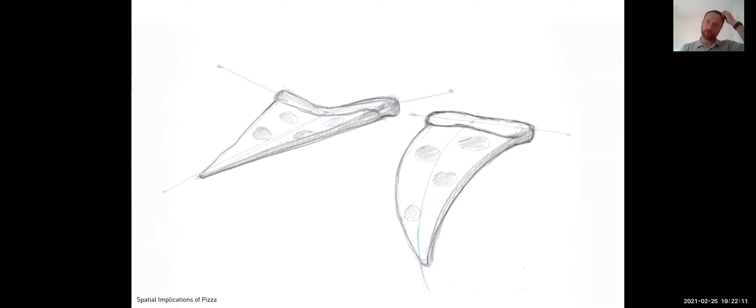We use the same principle with paper airplanes, and there's a structural principle at work here called virtual depth. Really what this means is that effectively the pizza, when we fold it, is acting as if it's the full depth of the fold from the lowest point to the highest point, rather than just the actual physical thickness of the pizza. We use this principle at my firm all the time, and any folded plate structure, which is not a super uncommon kind of structure, uses the same principle. So this is one of the projects that was on that intro slide.

This is actually a stair in a San Francisco Victorian house, and basically what the principle is here. So this is all eighth. It's actually a little less than eighth. Not quite 16th inch, but a little thinner than 1/8 inch steel. So very, very thin steel, and it's all perforated, which is why you can kind of partially see through here.

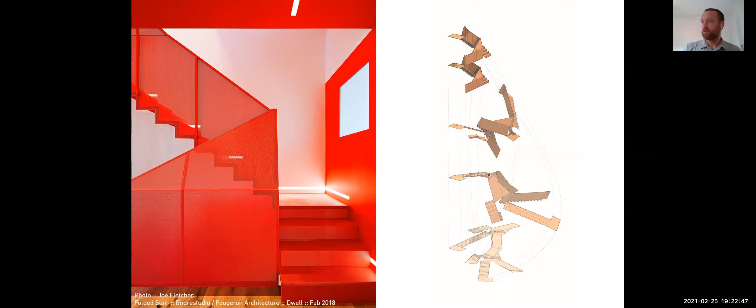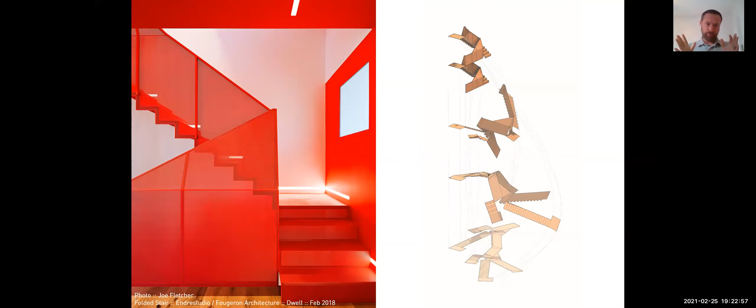And so that alone, if you stand on it, super flexible, right? It's just going to kind of bend and buckle and even dent under a person's weight. But when you start to fold those things, you get substantial stiffness out of this. And so we can make a 2-story high stair out of conceptually a single folded plate, folded piece of steel. And that's what you see on the right in this diagram: conceptually the whole thing is basically made out of one piece, and then we just fold it into this 3-dimensional

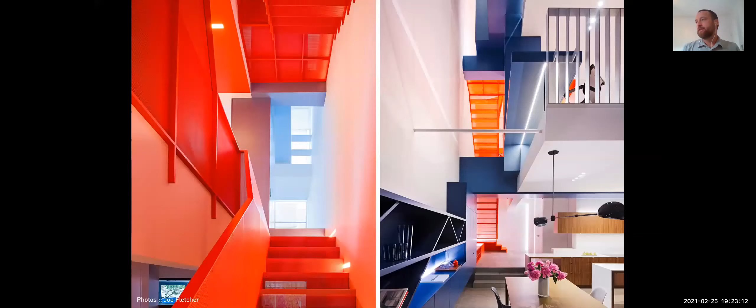structure. And the reason why this was so important, not just because it's awesome, but also because with these Victorian remodels, they're very narrow houses. And so when we were designing this, we were working to cut through the house as much as possible and really open up the space. And so there's this huge glass wall kind of behind the camera on this right image. And the last thing we wanted to do is then go put a solid staircase right through the middle of this. All the work that we've just done would have been sort of negated by the stair.

And so the use of this perforated stair allows that to not only have some life and movement through the space, where we can kind of see that red color winding its way up through the house, but it also allows light all the way deep into the house. And so again, it's like a basic structural principle. How do we accomplish something spectacular in a simple, easy to understand way? And then what are the spatial implications of this? This is really the design ethos of my firm and my work over the last 7 or 8

years. So the next project I wanted to look at kind of builds on this idea. And so this was an idea of a flat packed adjustable pavilion. So you could basically break this down and ship it in a box, and then you could pop it up into these little shade structures. And the exploration here is kind of related to that idea of folding. It's connected to an idea, oops, sorry about that. It's connected to an idea of bending.

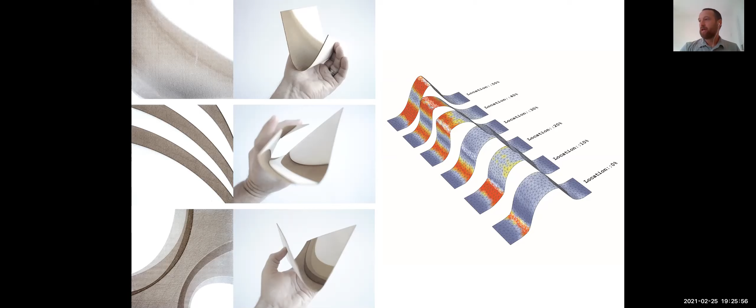Basically what we were looking at was, could we locally control the depth of the material in order to create specific types of bends? So you take a flat square element, and if you have a low spot, that creates a soft hinge or a locally weak area. And then as you flex that, it naturally bends the shape into whatever form you're trying to make it take on. And so with the same system, just changing the location of these curves, we create hinges in different spots. And the right diagrams show a number of different orientations and iterations of the same system, just slightly different CNC milled curves.

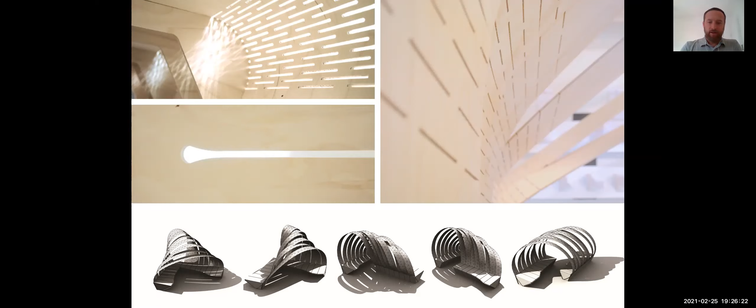So moving on to maybe something a little bit larger. This is a bridge that we just finished. It's actually almost a year old now, opened in March of last year. And this is in Ohio, just outside of Columbus. It's a pedestrian bridge. What you're seeing in the background here is the old town, which is kind of the old commercial and tourist center of this town, connected to this new development that's on the other side of the river here.

And so this bridge is super unique. But the main thing I wanted to focus on here is, again, it looks very complicated, and there are some very complicated structural problems here. But what allows us to approach these is very simple, very basic principles. So when we look at that central tower, for example, the cable that supports the whole bridge has a huge downward force, right?

And what we're looking at is when you split that force to create space between this and this, and this is what we do with houses, right? With a roof, it's what we do with all buildings to a certain extent. We take a vertical force and we orient it into either two angles, or we use an arch, or we use some other means of transferring that vertical force to a vertical force somewhere else.

So here we split that vertical force into two diagonal forces, which creates a thrust, right? It's a little unbalanced. And so the tendency would be for that element to just sort of kick out and flatten. And so we tied it back together again. And then that creates two smaller vertical forces that go down to the ground.

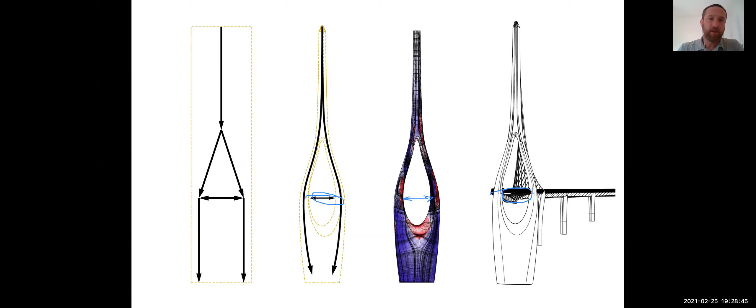Could you talk a little bit about how you're creating these images, the software programs you're using? Yeah, that's a great question. So we work really heavily in a program called Rhino, which is a three-dimensional modeling program. Rhino is for architects, it's sort of the gold standard. It allows us almost total flexibility in the geometry without putting too many limitations on us.

So the other major programs that you guys have maybe heard of is Revit on one end, which is a building information modeling software that Autodesk, who makes AutoCAD, produces. So you've got Revit, you have a program like Rhino, and then you have programs like SketchUp. And that's sort of a gradient in terms of what they're used for.

So SketchUp is an extruder, which means that it is very, very fast to model traditional rectilinear forms. It can also do curves and very complicated things, but you have to be a little bit more advanced to do that. Rhino was actually originally designed for boat building. And that's one of the reasons why it handles these very curvaceous forms really well. And then Revit is much more of a documentation program.

So Revit knows that you're modeling a building, which means that it's really hard for our work. One of the reasons why we don't use Revit is that it is expecting a wall to be vertical like a wall. And a lot of times our walls are not exactly vertical. Our doors aren't exactly door shaped, and our windows might be partially on a wall side and partially on the roof. And so sometimes we'll use Revit at the very end of a project just for documentation, but for design and for a lot of these diagrams that I've been showing, we use Rhino.

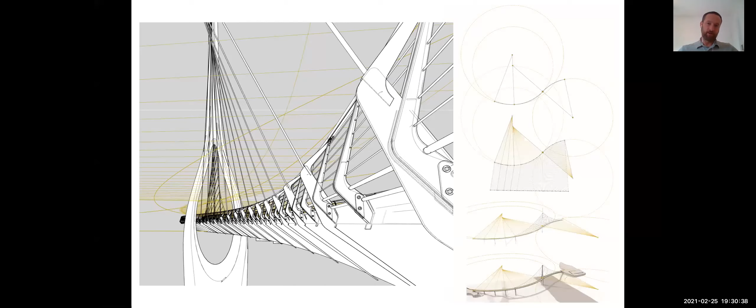And then Rhino has a bunch of plugins that basically add functionality for structural engineering and computational design and this sort of thing. Thank you. Sure.

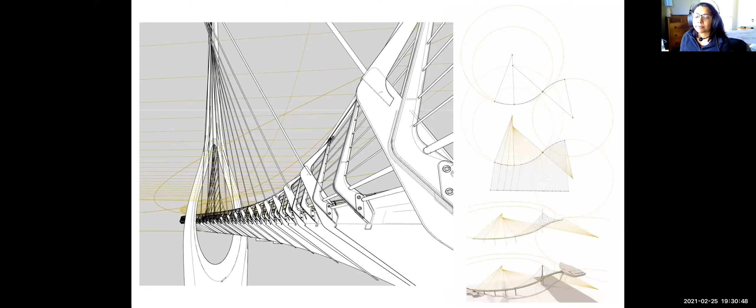And actually, this is probably a good moment since we're talking about software. This is one of the renderings of the bridge. And so this was produced with a plugin for Rhino called V-Ray, which is a standard renderer in the industry, but then a whole lot of work in Photoshop as well. It's an interesting thing because we're not just making pretty pictures for the sake of making pretty pictures. We're spending $22 million to build this bridge.

And one of the things that people want to know when they're spending that kind of money, whether it's the city who's actually heading it or the public that they answer to, is what are we getting for this money? And so we end up spending a lot of time and energy representing our projects in ways that people can understand. And some of that's trying to explain the structural forces and the efficiency, but a lot of times it's trying to just capture what is this space going to be like? What is the experience of being on this bridge going to be like, for example?

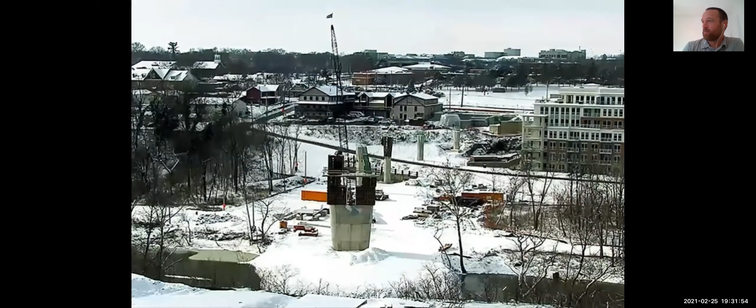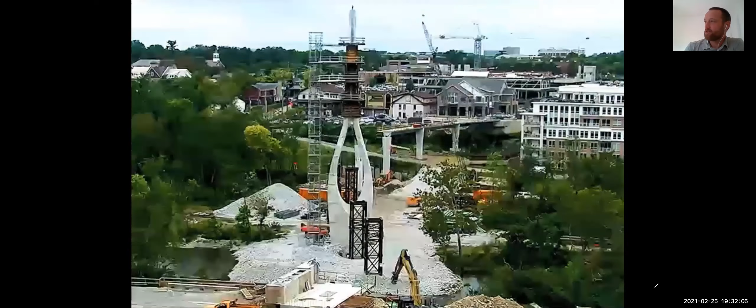And then these are just fun. So this is the construction sequence, basically one image every day of them constructing the tower. They actually modified some highway bridge forms with custom CNC milled foam inserts. That's how they cast the central tower. And then you can see they're pushing all the bridge sections in.

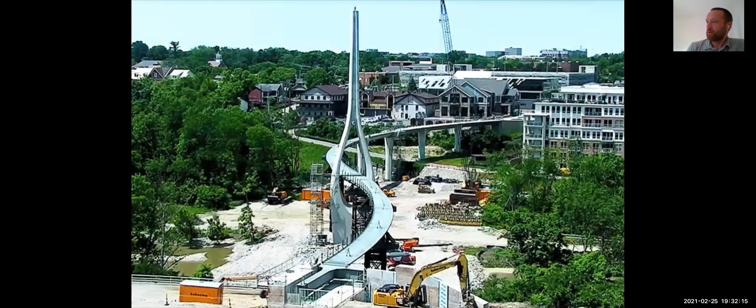They've got these little stands down below that support it temporarily, and they're moving rock around to kind of provide the working surface. There's the bridge, and then a couple of steps back, you saw the stands disappear. So they put the cable in here. That's not a very good color for this image. Let me try a different color.

So they put the suspension cable in, and then what you basically do is you have these support points which have the bridge a little higher than where it's supposed to sit. It's basically jacked up on top of these. You connect all the cables, the hanger cables they're called, and then you tension them to the proper tension, and then you basically unload the jacks, and so you transfer the load from the support points slowly onto the cable structure.

You try to do that very evenly, and there's a whole subset of engineering which is literally just how do you actually build these things. It's one thing to say this is how it's designed when it's finished, but there's also what's called construction sequencing or staging, where we really have to go through every step along the way and make sure that things are not going to fail as we're going along.

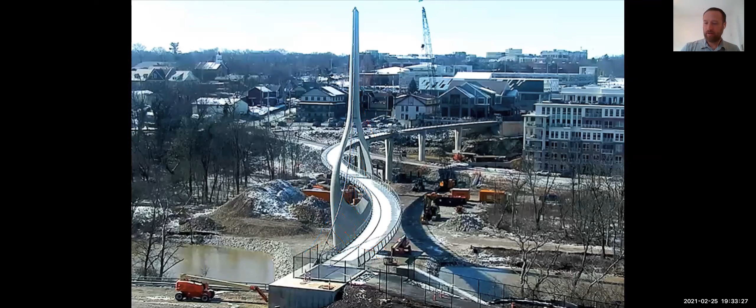Dave, we have a question in the chat. How much liberty do you have when designing structures like this bridge? Are there a lot of limitations? Yeah, that's a great question. The short answer is yes, there are a tremendous amount of limitations for anything that you do. And in many ways, the larger the scale, the more, well, maybe that's not exactly accurate.

So with things that are in the public eye, my firm specializes in civic projects. So even though we do a lot of private work as well, a lot of the stuff that we really pour our time and energy into are projects like this, bridges and parks and that sort of thing. So the public has a say in it, and then there's also the actual owner, which is usually a municipality or the city in this case. And then there are a huge number of stakeholders, various property owners, leaders within the community, who also have some degree of input on these projects.

And so our job as the engineer is to solve the problem. Our job as the architect is really to make sure that the solution is something that everybody understands, is on board with, and is excited about. And you're never going to have a project like this where, actually this one has been very surprising. I have not seen any negative feedback. Because anytime you spend money on anything, there's always some small or maybe large subset of the community that goes, that's not what we should be spending money on.

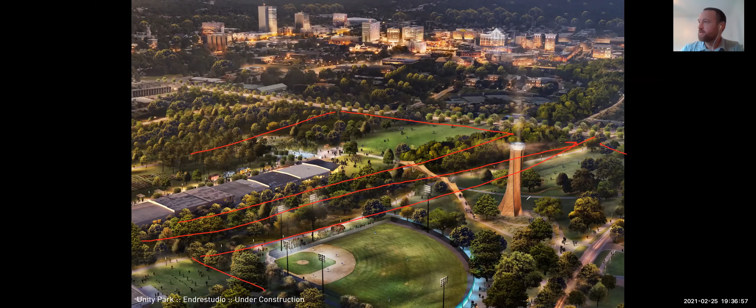And so for us, as we were approaching the different elements in the project, one of the things we were primarily concerned with is how do we build this connection between the two sides of these parks to really try to symbolize, both practically and symbolically, this idea of unity and including all the communities in this area as the city moves forward, which is really important to the city.

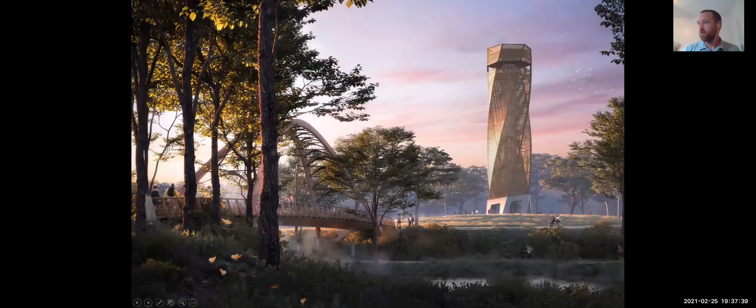So this was one of these projects where we got a lot of positive feedback on different things that were being published as we were going through the design, and we got a lot of negative feedback too. We got a lot of reactions of we shouldn't be spending this much money on a park. We should be spending it on whatever, right? Whatever that citizen's primary concern was.

And in the end, this is just bad timing, this is something you guys are going to have to deal with in your careers as well, especially in civic projects: you spend a tremendous amount of time and energy and effort designing and working through these things. And then something outside of everyone's control, like the pandemic, hits and cripples the tourist industry in this city, which is how this park was almost entirely funded. The public portion of the funds, which is about 60% of the overall budget for the park, was funded essentially by a bed tax and restaurant tax in the city.

And so all of a sudden it went from being something where the city is booming and everyone's like, yeah, this is a great thing, well, not everyone, but there was good consensus, people really wanted it, to being where the city council was basically like, we cannot spend $40 million on this park of money that came from restaurants and hotels when those restaurants and hotels are closing and really struggling. Which I agree with. I think that they made the right call, but it's pretty heartbreaking because a lot of this stuff got cut or reduced or postponed.

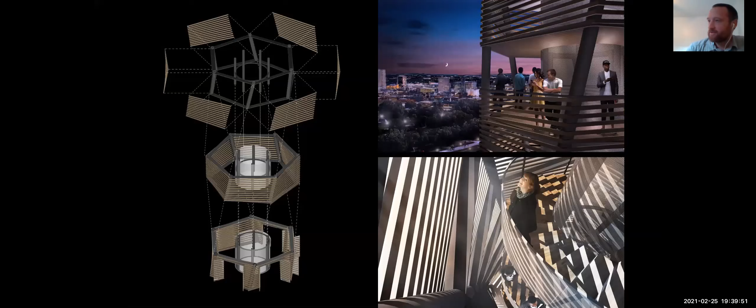And so one of the positive things for me is that this observation tower, which is one of my favorite pieces of this park, and we worked really hard to develop this, they just phased it out of the project rather than canceling it, and they're seeking private funding. So basically we're in the process now of trying to find enough manufacturers and corporations in the area who are willing to put forward the money to actually build this thing. And it's going pretty well. I think we'll be able to start construction in maybe a year and a half. It's a challenge when you're working in the civic realm, for sure.

So is the park not built? Is that what you're saying? It was designed and then not built at all? Yeah. Well, so no, they are building. They're still building the park, but basically a significant number of the pieces... If I just go back a couple of slides, basically the bridge got redesigned. So they're still having a bridge here, but all of our architectural and structural expression got axed. So it's just a very simple kind of crossover now.

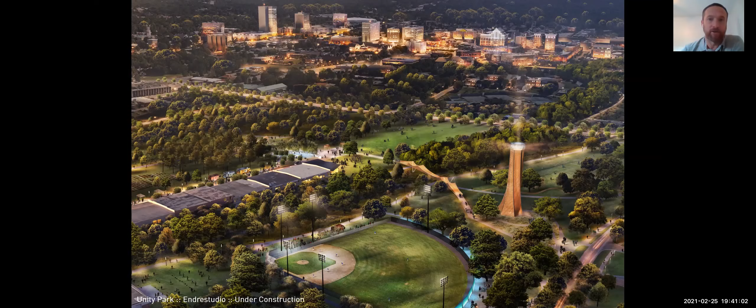This visitor center got cut basically in half. I don't have any detailed images of this for this quick presentation, but the band shell area, that's cut. The visitor center got much more simplified. A lot of the actual landscape architecture details have been reduced or simplified. So they're still doing the park. It'll still be a good asset for the community, but the scope and vision had to be scaled back substantially just because of the reality of the moment that we're in. Wow. That's how things go sometimes.

So, I wanted to show a couple of quick images, and I know I'm running out of time here. I wanted to leave a little bit of time for questions, but just really quickly. I wanted to show this one to encourage you guys, as you're considering what segment of engineering you move into and how you develop in your professional careers, to not forget about understanding what in engineering we often call back of the envelope calculations. Basically, it's the conceptual proof. So you're not doing the full detailed calcs. You can do simplified versions, which get you most of the way there.

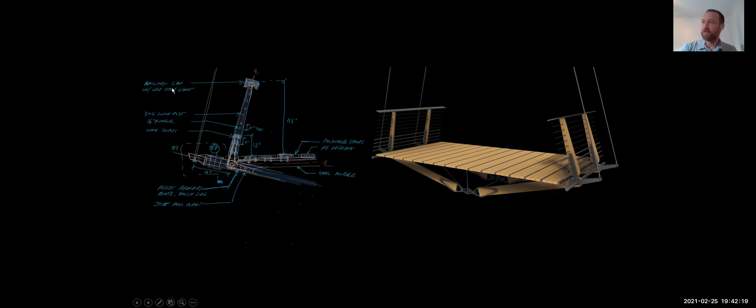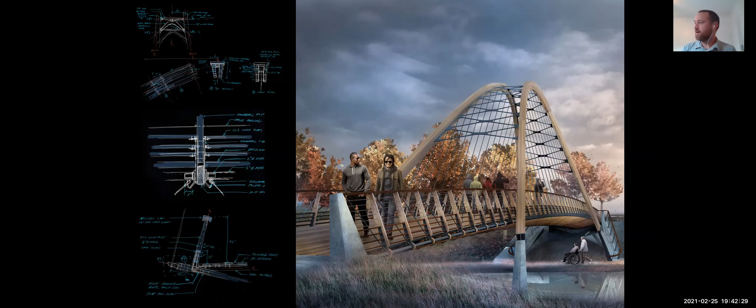And in a similar way, being able to hand sketch and understand how something gets assembled is really how our work gets done. And then the three-dimensional model that's on the right, that's the proof of it, right? This sketch is 75 or 80% of the design. All the calculations and the aesthetic of it are being set off of this detail. And once we have that, which we can produce and iterate on very quickly, we can make these models to validate and define our concepts. And so here again, on the left is a series of sketches for these different ideas, and then the final design shown on the right.

And then I'll just blow through this one because it's kind of fun. This is really the point of this. This is a concrete, kind of crazy concrete structure. And this is one of these direct integrations of structural design and architecture, where the vision for the project and the way that we modeled it, we actually had to write additional software in order to prove this.

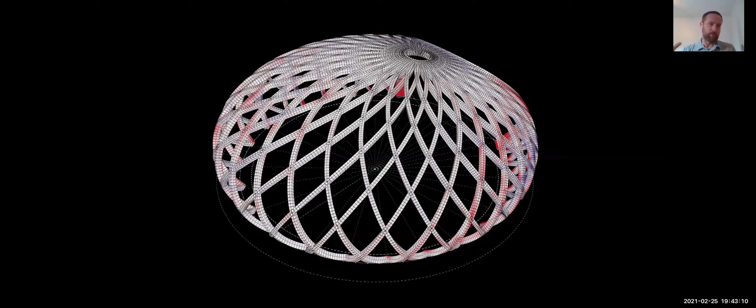So this is the stress of this concrete structure, but with every material, there are different building codes you have to abide by. And concrete has some very specific characteristics because there's the concrete, but there's also steel. So it's a composite material. And so basically for every one of these individual elements, we're using what are called interaction diagrams to figure out exactly how much reinforcing needs to go in them. And from that, we mapped that back onto the model.

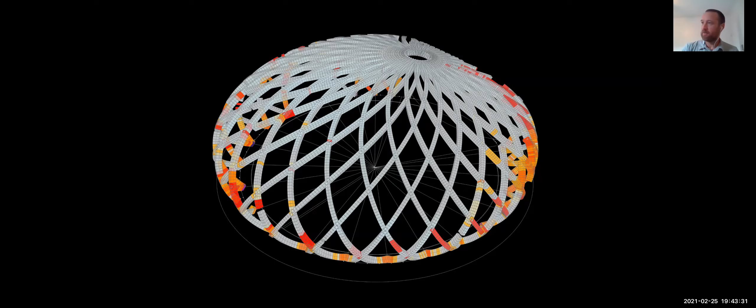So instead of just showing the stress, we're actually showing where the reinforcing is required, the high points and low points of reinforcing. And then we had an algorithm that smoothed that out so that we can basically get this from something where structurally we have the understanding of the problem, but then we have to march that all the way through into something that is buildable, that can actually be constructed.

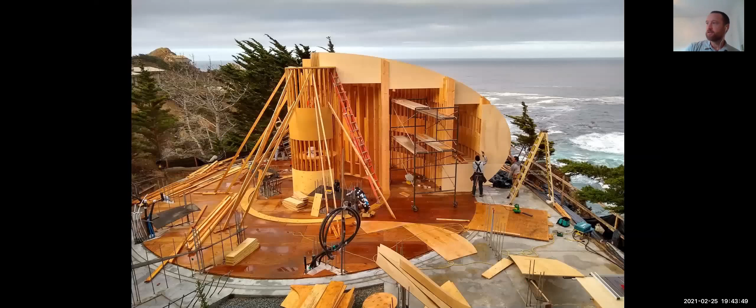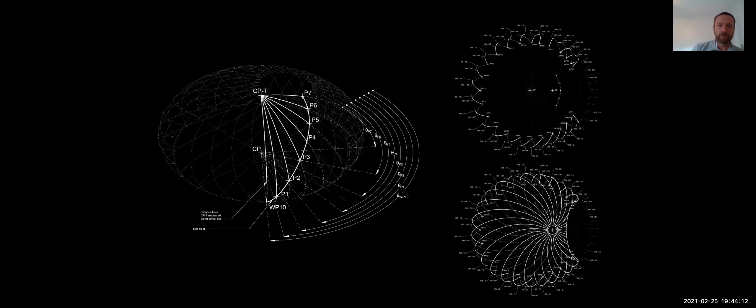This is kind of a fun project because this is all very digitally controlled. So this curve here for the dome was all CNC'd, so it could be as precise as possible. And then all of the formwork for the concrete, every element was modeled, oriented, and CNC milled, and then eventually installed as the formwork for these guys.

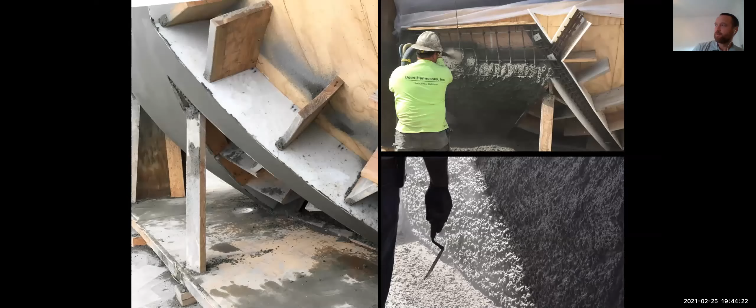And because this is such a novel project, we also had to do full-scale mock-ups, which is something that you guys will probably have to do at some point in your careers as well. This is under construction now, so it's a little bit further advanced from what we're seeing.

All right, cool. Took it right up to my time limit here. That's okay. Do we have any questions for Dave about the work he's doing or his educational path? I have a question. Go ahead. First, I want to say thank you for the presentation. I'm really interested in the work you're doing, and I'm a fan.

But I was wondering if you can speak on your trajectory transitioning from art to structural engineering, and what the setting was for you to decide that transition, and what the timeline was for you to actually go from one to the other. Yeah, it's a great question, Luis.

So you always have different things that precipitate movement if you're shifting career goals or educational goals. And for me, there were a lot of things happening in my life that made me take a moment and say, okay, what do I actually want to be doing for the next 5 to 10 years, as opposed to what am I doing right now? And up until that point, when I was studying art, I was really thinking, what do I want to be doing right now? And then I started to think, what do I want to be doing in 5 or 10 years?